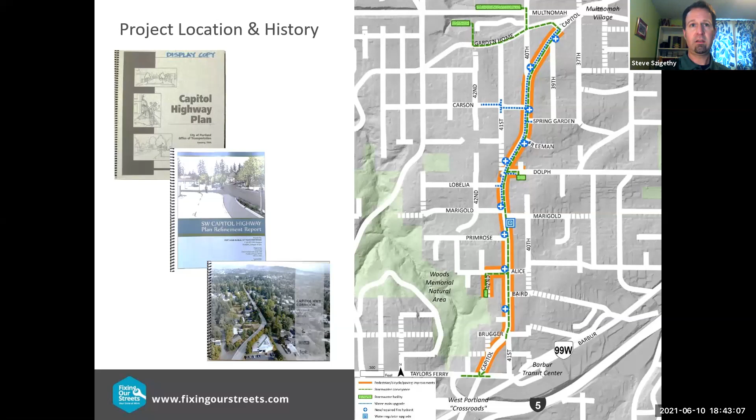This project, once we were able to have the funding come together, which really came together in May of 2016 when city voters approved the Fixing Our Streets 10-cent gas tax, and then later came together to an even greater degree with contributions from the Bureau of Environmental Services, as well as a $2 million allocation from the 2017 state legislature. We were able to move forward with design engineering starting in 2016, 2017.

And since then, we've been very fortunate to have, I'm sure many of you on the call tonight, take part in the design process. We had the volunteer Capitol Highway Subcommittee led by Chris Lyons, who you saw just a few minutes ago. We've had, by my count, at least 8 subcommittee meetings, at least the ones I was able to attend. We've had 3 open houses before the pandemic.

We've had community walks, office hour sessions, more than 60 property owner consultations, right-of-way negotiations with property owners on 90 different easements or acquisitions, newsletters, e-bulletins, other advisory committees, including just last week or two weeks ago visiting with the Multnomah Village Business Association. And here we are on June 10th, 2021 for this open house.

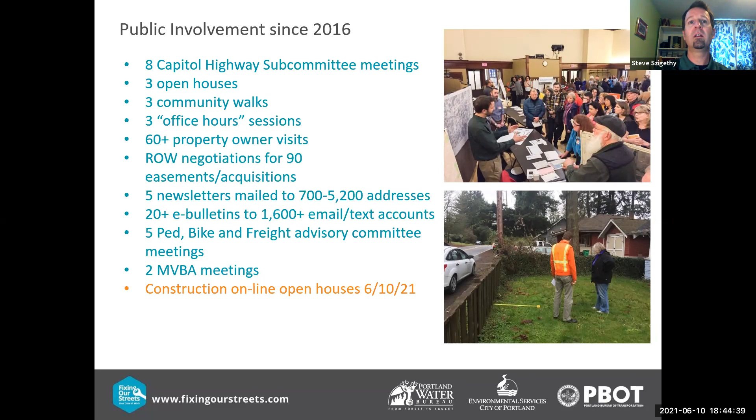So the project scope: as you probably know, there are no sidewalks, bike lanes, or proper stormwater management facilities on this part of Capitol Highway. And this project aims to change that.

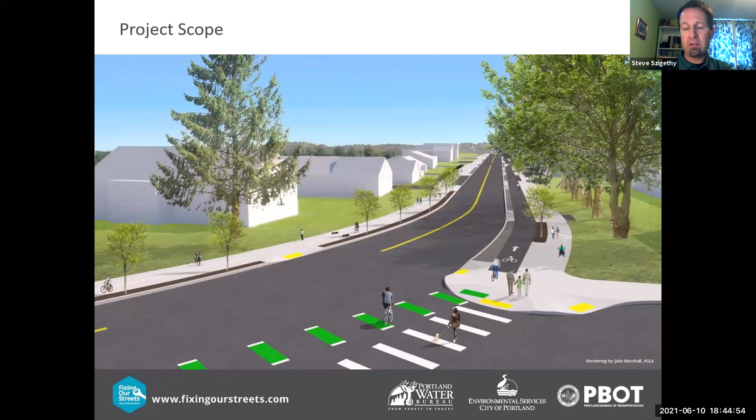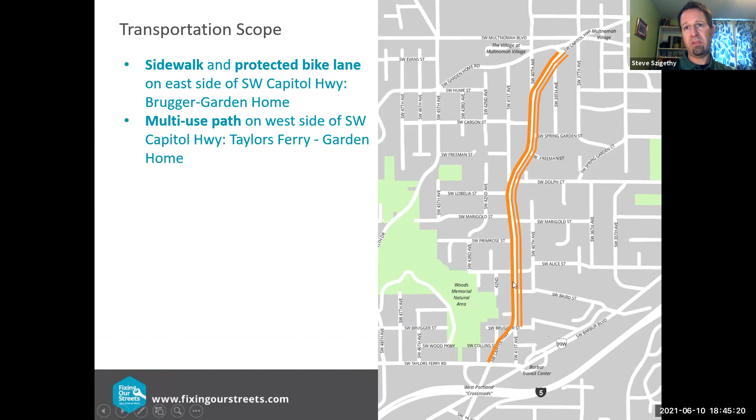In particular, the transportation scope will feature a sidewalk and a protected bike lane on the east side of Capitol Highway from Brugger Street down up to Garden Home Road. On the west side of Capitol Highway will be a multi-use path that will accommodate cyclists going southbound, which is generally uphill, and pedestrians on that side. So you have pedestrians on both sides, a separated bike lane on the east, and a multi-use path on the west.

There will be 5 new pedestrian crossings at Brugger, Alice, Dolph, Carson, and Garden Home. 4 out of the 5 of those are paired with bus stops. We worked with TriMet to consolidate the bus stops at those locations. At the end of the project, we'll be completely repaving Capitol Highway from Collins Street, almost down to Taylor's Ferry, all the way up to Garden Home.

On Multnomah Boulevard, there will be a protected walkway and bikeway on both sides. This is a paint and post treatment that'll provide a bit safer space between 40th and 45th, next to the stormwater facilities we'll be putting in.

And in places on side streets where we needed to bury pipes, we took the opportunity to also do street surface improvements. That means we'll be paving the gravel section of 42nd Avenue down by Woods Natural Area, repaving a portion of Alice Street west of Capitol Highway, and repaving and putting a sidewalk on Dolph Court for 250 feet east of Capitol Highway.

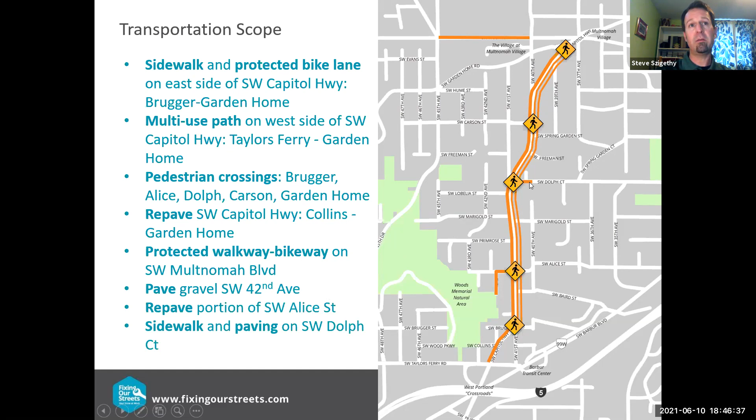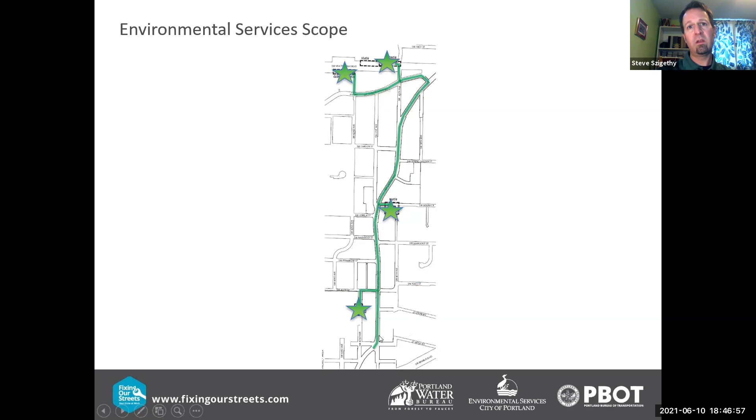The environmental services, or stormwater, scope is very significant. The runoff that falls on this project area onto the street and sidewalks will be collected in inlets and go into a system of 7,000 linear feet of pipes leading to 4 regional stormwater facilities. We also call those rain gardens. These are facilities that collect the water, filter it, clean it, and slow it down before entering the streams, improving water quality in streams including Tryon Creek, Vermont Creek, and Woods Creek.

2 of these facilities will be on either side of Multnomah Boulevard near the post office. We call this one Multnomah North, next to the post office, and Multnomah South, on the south side of the boulevard next to the village condos. There's also the 42nd Woods Creek facility at the end of 42nd, which includes some stream restoration work and a new pedestrian bridge in Woods Memorial Natural Area on the trail, and one on Dolph Court.

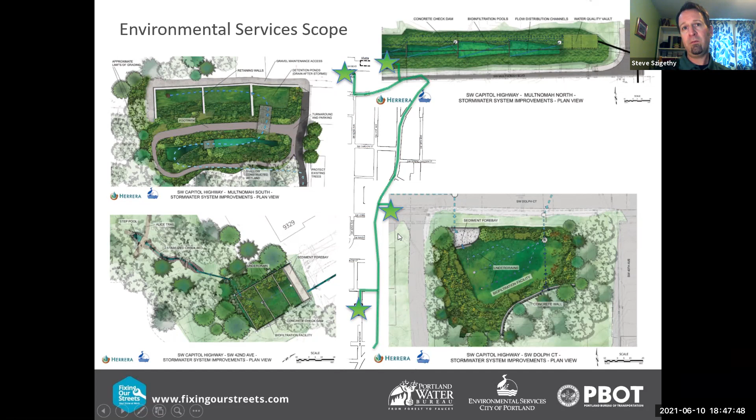And there's water system scope as well. The Portland Water Bureau has joined us on the project. Having the 3 bureaus work together on this project at the same time reduces disruption for the public. It's more efficient with your tax dollars and ratepayer dollars.

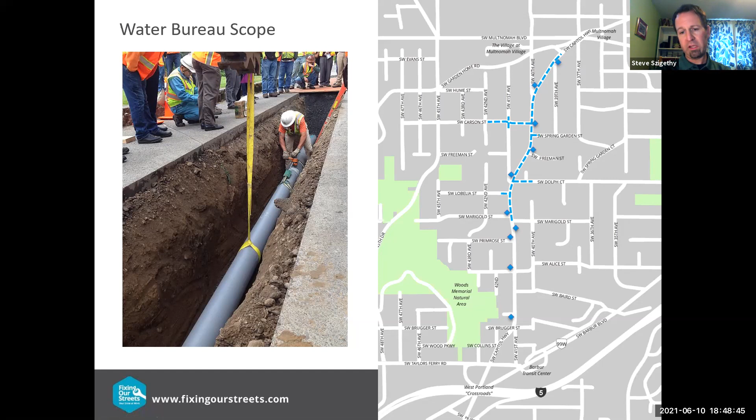With our contractor, they'll be upgrading the water main on Capitol Highway from Marigold up to Garden Home, as well as 2 blocks of Carson Street and a little bit into Dolph and Lobelia. There's also replacements and upgrades of fire hydrants and regulator vaults. In addition, if you live along Capitol Highway, there will be some water meter adjustments that need to take place. We will take care of those and let you know in advance when those are happening.

Project funding: this is a locally funded project, not a federal project. It's got 6.6 million from the Fixing Our Streets 10-cent city gas tax, almost 5 million in transportation system development charges that comes from development, and 2 million in Oregon lottery funds. That was the legislative action from 2017. Thank you to those who advocated for that.

BES, Bureau of Environmental Services, really stepping up to the plate with a $12 million contribution to the project, and Water Bureau as well paying for the water main upgrades, for a $27.5 million project budget. This covers not only our construction contract with Landis and Landis at 14 million, but also all the planning, project management, design engineering, right-of-way acquisition, construction management and inspection, public involvement, and some contingency funds. So we have a well-funded project.

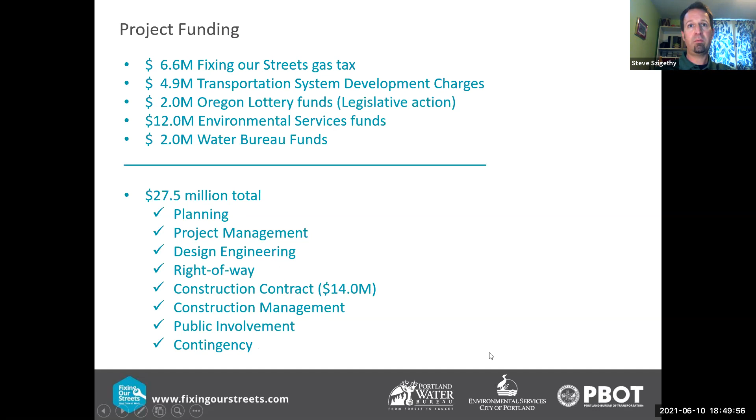Now we'll get into why you're probably here, to talk about construction. This is just an overview slide. You heard some of this earlier. This is an 18-month project, starting next week and going through December of 2022. It's a big project, it's going to take a long time to build. It's not going to be constant activity in every place all the time. You'll see waves of activity move past your home if you live along here.

Work hours for our contractor are going to be Monday through Friday, 7 a.m. to 6 p.m. They may not go to 6 p.m. every day, and some Fridays may be quieter. However, there may be some Saturday work for them to get this project done on schedule. We are looking at 6 nights of night work at the intersection of Multnomah and 40th, looking to be at the end of this July. And then there's the major southbound detour onto 45th, 48th Drive. I'll get into all of these things in additional detail here in a minute.

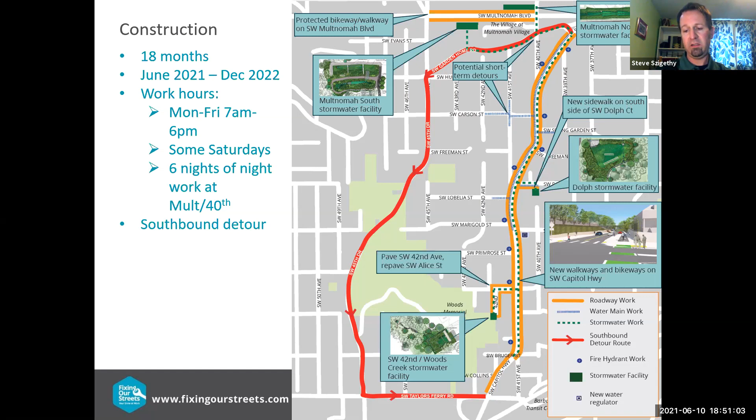The first work you're going to see, starting June 14th this coming Monday, is they'll start clearing, grubbing, and widening on the side of Capitol Highway, starting at Spring Garden Street and moving south towards Marigold. Mike and his crew are focused on these areas, where retaining walls need to be built, so they want to get a head start on those locations.

So you'll see erosion control fencing. Some of the tree protection fencing is already there, I was out there today. That's installed on Garden Home Road now.

Tree trimming: some of the trees that are not being cut still need to have some of their branches trimmed so the contractor can move their equipment around without hitting tree branches. There are a few remaining larger trees that do need to be cut. Most of the conflicting trees were actually removed in 2020, in April and September of last year. But there's just a handful of additional trees on private property that we had to wait until we had those permissions to cut, so that will happen as well.

Then clearing and grubbing, which basically just means getting rid of ground cover vegetation, grinding roots and things like that. Then they'll widen out the side of the road with some excavation and rock. During this initial phase on Capitol Highway, two-way traffic will be maintained for these first few months, so the southbound detour will not start right away.

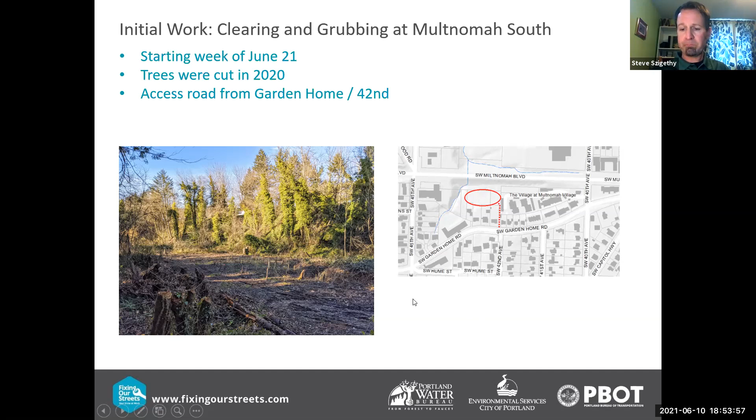Another significant batch of work starts June 21st and will be pretty impactful on the north end of the project: pipe work in Garden Home, 40th and Multnomah. We're calling that the north end pipe work, and I have a few slides showing what that will look like from a sequencing perspective.

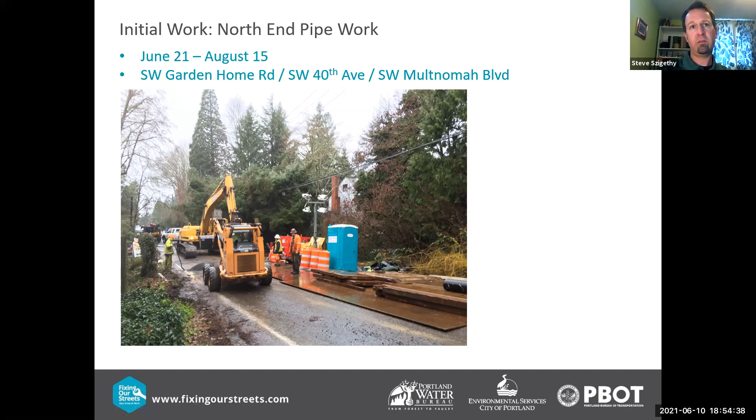They'll saw cut the pavement, dig a trench, and install pipes, using steel plates to cover the work when they open the road back up at the end of the workday. While doing this, those portions of the road will be closed to through traffic. People living along here won't be trapped in their homes; crews will work with you to get in and out. But through traffic won't be allowed, so even at the west end it'll be kind of a dead end. They'll start at 42nd Avenue and dig the pipe through, moving east toward 40th Avenue.

This starts June 21st and is a few weeks of work. As they move east, they'll get the pipe through the Garden Home and 40th intersection, meaning people on 40th will see another local-traffic-only situation. Then they'll continue east between 40th and Capitol Highway, getting the pipe installed there. This pipe work collects all the runoff from Capitol Highway and takes it down to get that water to these two stormwater facilities. That's why we're doing pipe work in Garden Home Road, even though in some cases it's kind of far away from Capitol Highway.

The pipe also goes down 40th and has to cross Multnomah Boulevard, so we're looking at doing a few nights of night work there—about 6 nights. We sent notices earlier this week to a 2-block radius around there because we need a noise variance to do that work. The 6 nights are looking to start around July 19th, subject to change, and will most likely be non-consecutive—maybe 2 at a time, or a few days in between—because they have to cut the pavement, excavate, install pipe, backfill the trench, and repave. They're also going to try to do some of the signal work during that time period.

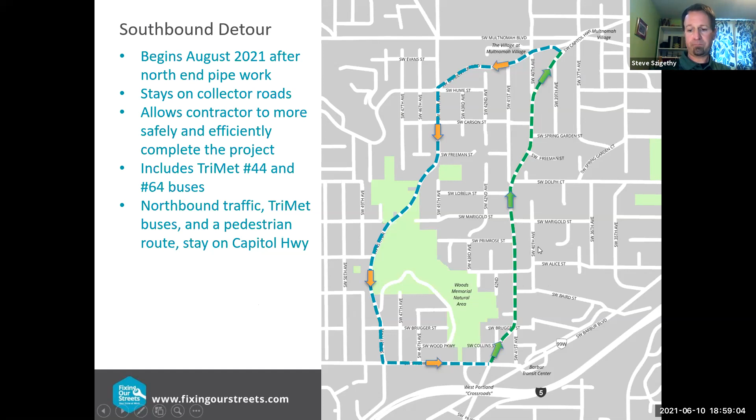I'm going to pause here and see if Brenda or Clay want to talk about the TriMet detours. Before the August detour, there'll be some impacts to the 44 in June and July, but then we'll move on to the main detour in August. So, Brenda or Clay?

Thank you, Steve. This is Clay Thompson. I appreciate your inviting us to this meeting. We've been working with PBOT for quite a while on this project, and it's been a long time coming, so we're anxious to get started with it and get through it just like you are.

If you take a look at the map on the right-hand side, this is the map we'll be putting into a postcard mailed out to about a half-mile range around Capitol Highway. It'll reach all the way over to 45th Drive and beyond, and also eastbound about a half-mile east of Capitol Highway. We'll also be mailing the postcard south almost to PCC Sylvania, and reaching out to PCC Sylvania directly, so they can pass information on to their students. If you look at the upper right-hand corner of the map, that's a good place to start.

As Steve mentioned, line 44 and 64 both use Capitol Highway southbound and northbound. The 64 doesn't actually stop at most of the stops on Capitol Highway between Taylor's Ferry and Multnomah, but there are a few where they stop—mostly right at the north and south ends, at Multnomah and Taylor's Ferry. The line 44 does have stops all the way through there.

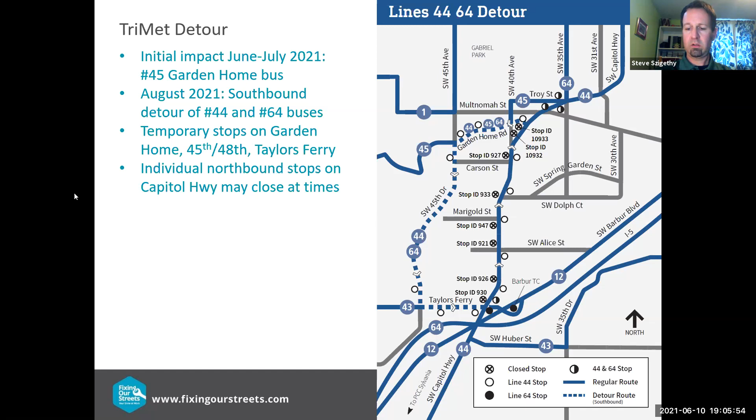Okay, moving on a little bit more about the detour, and that is mitigation. We've heard concerns about the detour for good reasons, and we want to let you know we're taking some actions. We took preemptive actions improving the crosswalks at 45th and Garden Home with high visibility crosswalk markings, and removing that sort of pork chop island on the northeast corner of the intersection to make a safer walking space.

We just finished putting in a new crosswalk at Carson Street and 45th, where one of the temporary bus stops will go. We made sure our posted speed signage is clear. We were able to successfully reduce the speed limit on the northern and southern end of 45th, 48th down to 25 miles per hour. Speed limit changes currently in the state of Oregon are done by the Oregon Department of Transportation, and we have to get permission from them in most cases. They did not approve 25 in the Woods area, so that's currently posted 30, but we were able to get 25 down near Taylor's Ferry and 25 near Garden Home.

Those signs are up. In addition to that, and this is brand new news, we had a request to look at doing a crossing at Marigold Trail, where there's a footpath from Marigold and 48th that goes along the road for about 100 feet, then goes into the natural area again and pops out on Marigold. We are committing to doing a striped crosswalk with signs at Marigold Trail to help out there. In addition, if we need to, we'll look at the signal timing at Taylor's Ferry and 48th. If we find the detour is causing backups at the signal, or if there's something we need to do for the pedestrian call buttons, we can adjust the signal operations at that signal if we need to.

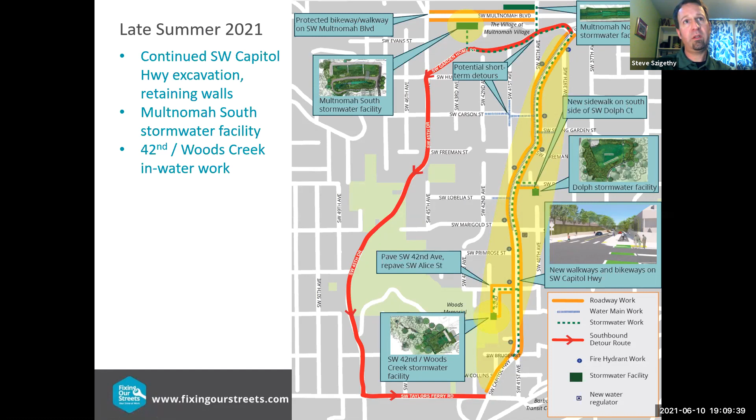Some of the work in the stream corridor can only be done during the summer to protect fish, so they'll be working on that. That's the second half of summer 2021, lots of action on Capitol Highway.

Moving into the fall, still lots of action on Capitol Highway, continuing the retaining wall construction and grading some of the other areas, and working on all four stormwater facilities at this point: Multnomah North, Multnomah South, Dolph Court, and 42nd.

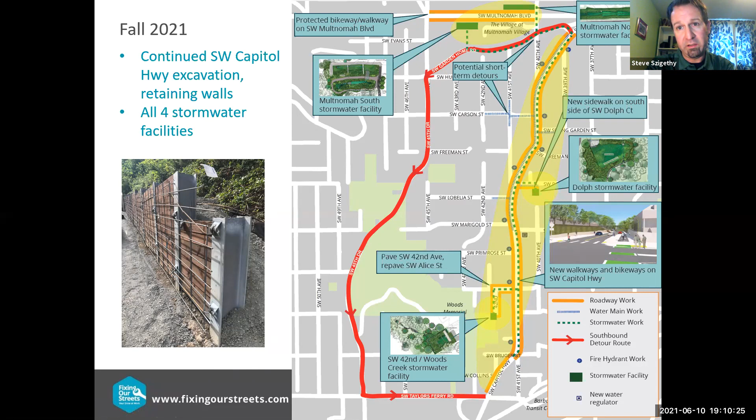This is a picture of a slightly different kind of retaining wall — a cast in place retaining wall. You'll see forms go in, and it'll have a nice faux rock feature. This was the type of retaining wall that people actually voted on in a visual preference survey during the design phase. So we'll be building those.

As we get into winter, with our wet winters, we can't move a lot of dirt or do much paving. So that will be focused a lot on putting the pipes in the road — the stormwater conveyance pipes that go in Capitol Highway for most of the length of the project will go in during this period.

The new water main from Marigold up to Garden Home, the water main on Carson Street, would go in during the winter and into the spring. So pipe work is something we often do then and will on this project.

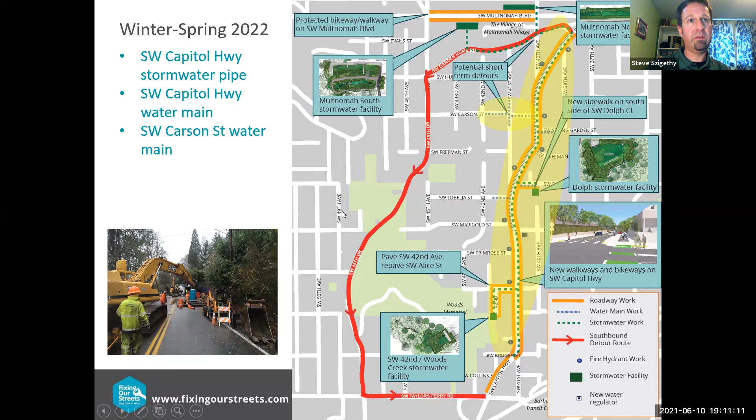Getting into the later spring, summer, and fall of 2022 will be all about providing the new sidewalks and bike lanes, a lot of concrete flat work — the sidewalks and bike lanes on the east side, the multi-use path.

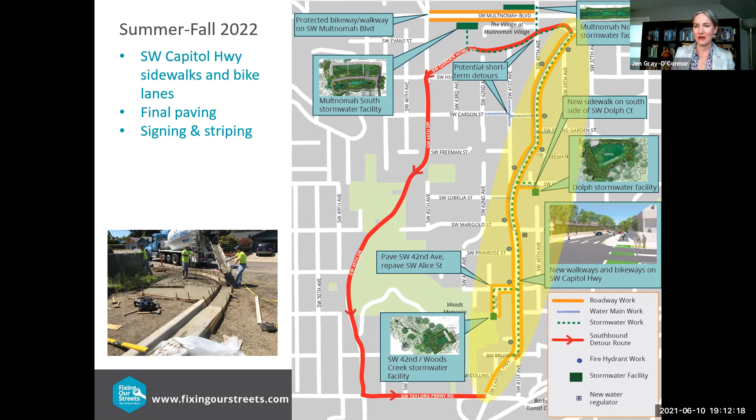Okay, I just want to check in. From my screen, I see that Steve is experiencing some technical difficulties. Clay, I see your screen, your video is still on — are you also experiencing the same issue? I can still speak, so it doesn't sound like it. No, I am able to communicate, I can see the screen and everything.